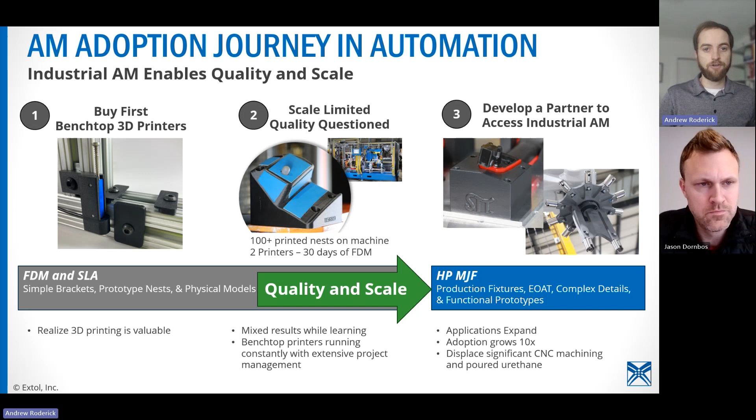When you talk about scale, right? I wanted to give you kind of a quote from one of our customers, and we see this frequently, where MJF 3D printing has a quick turnaround time. It's never delayed by raw materials, and the cost is similar or better than CNC machining. And this automation company, and we have multiple, have displaced $200,000 plus worth of CNC machined details that would have typically been poured urethane, CNC Delrin, CNC aluminum, those type of materials.

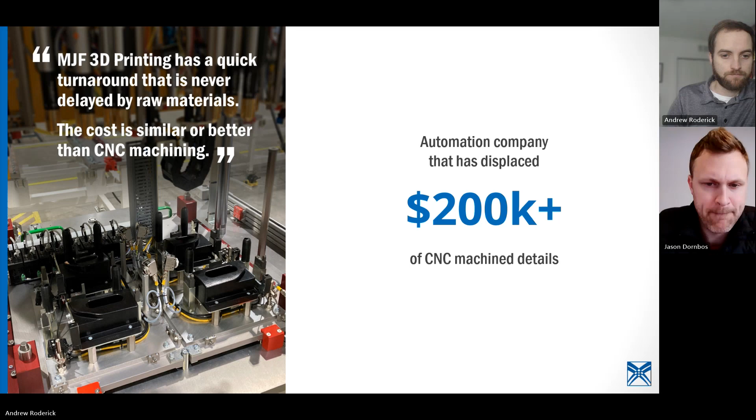So you may ask, where do we find the value of additive manufacturing automation? And the three areas that we see the biggest benefits would be dependable lead times, where for printing we could be in the 5 to 10 business days versus maybe 4 to 6 weeks if you're outsourcing CNC. Different if you have internal CNC, it's a different kind of advantage there.

Design freedom. When we see low to medium complexity details, it's similar to CNC cost. If we see high complexity details, it's less than outsourced CNC cost. And then soft touch and non-marking materials, being able to replace machined plastics or poured urethane with a printed TPU.

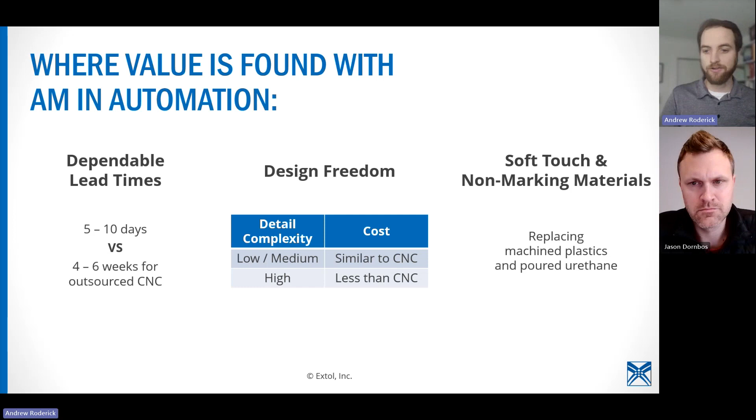So there's a lot of different 3D printing technologies, and we're not here to split hairs on all of them, right? But when I think about the largest majority of 3D printing technologies that are used in automation, there's really three. There's FDM, or fused deposition modeling. Think of that as building up layer by layer with a heated plastic going through a hot end. And that's typically what people think about when they think about benchtop or at-home 3D printing. You can see the layer lines, and it's just building with melted plastic and extruding each point of the part.

Then there's SLA. That's more of a resin-based technology, thermoset plastic versus thermoplastic. So it's UV cured, it's an engineered resin. It's not something that you can melt or reshape after it's printed. And then multi-jet fusion, powder-based, and I've actually got a video that we'll play here shortly that runs through what that industrial 3D printing looks like.

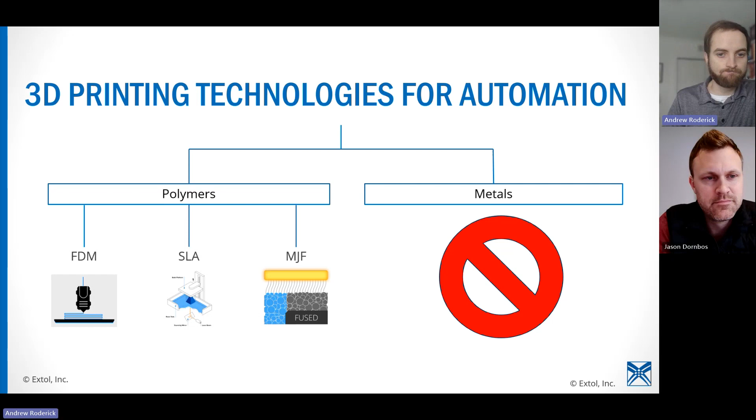And then I've got metals on there. A lot of people talk about metals in automation and like, how could we use 3D printed metals? This is going to be the next big thing. I don't see it quite yet because a lot of the things that people are looking for are simple hex posts or simple little details that the cost of the machine just doesn't justify it. So here's a quick video on the HP Multi-Jet Fusion 3D printing process.

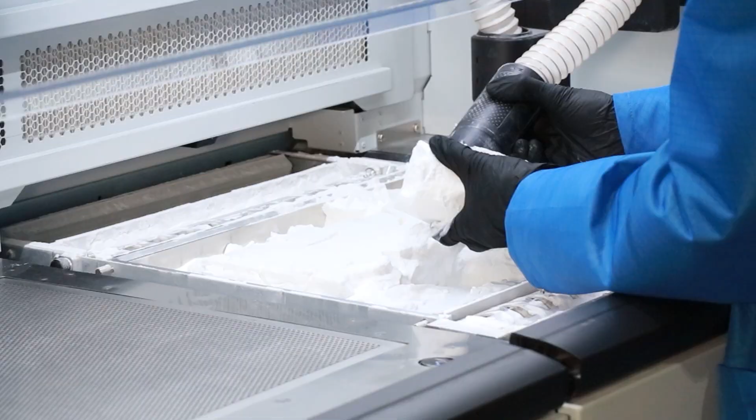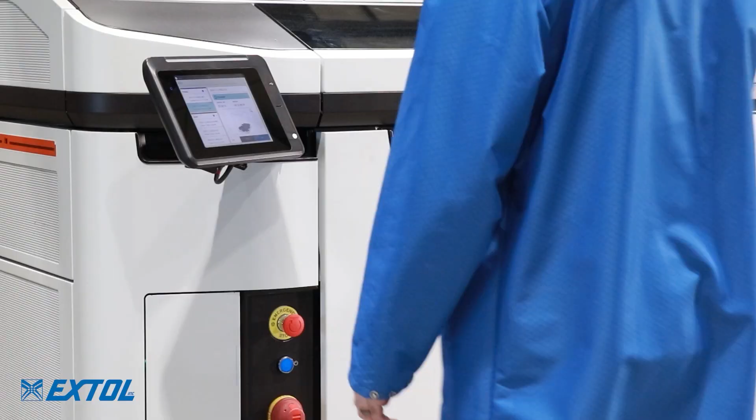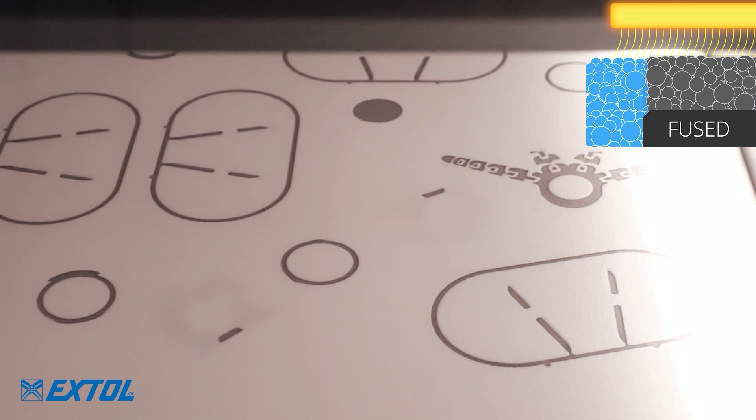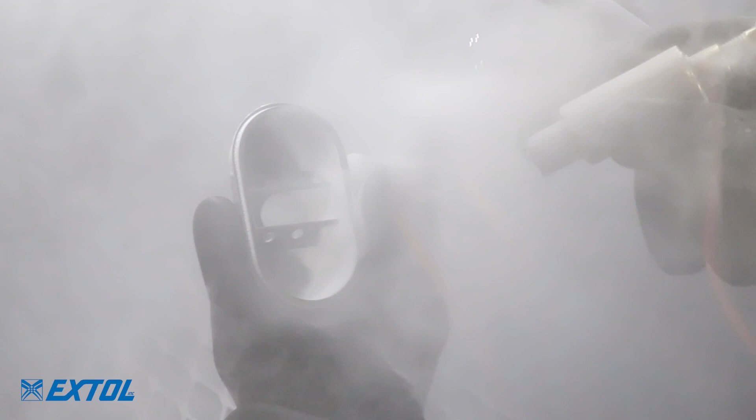HP Multi-Jet Fusion is a powder-based 3D printing process unlocking new efficiencies geared towards enabling production. Let's take a closer look at the printing process from start to finish. The process starts by evaluating each part and selecting the optimal print orientation. The parts are then placed in the build envelope. Special care is made to balance height and pack density while avoiding sudden changes in printed surface area. Parts are nested in 3D space within the print envelope, which is approximately 15 by 11 by 15 inches. Once the build is packed, it is sent to the printer. The build unit is inserted into the processing station to be filled with powder. The station automatically fills the build unit with the desired ratio of recycled and new material. Typically, the mixed ratio is 80% recycled and 20% new. The Multi-Jet Fusion printing process uses the highest percentage of recycled material of any 3D printing process. Once filled, the build unit is inserted into the printer and the printing process is initiated. The parts are grown layer by layer, 80 microns at a time. There are 4 steps to the HP Multi-Jet Fusion printing process. First, powder is spread across the build area. Next, fusing and detailing agents are jetted onto the powder. These aren't binders, rather, they respond to IR energy. The fusing agent absorbs IR energy and causes the powder to get hot, while the detailing agent evaporates, causing the powder to cool. This causes a sharp temperature transition, which results in a fused part with distinct, precise edges. Multi-Jet Fusion parts are stronger than those printed with SLS and other technologies due to greater energy exposure. On each pass, energy is absorbed multiple layers deep, creating strength in every direction. Once the printing is complete, the build unit is removed and the cooling process begins. Builds can be naturally cooled or fast cooled in the processing station. A full build naturally cools in about 24 hours, and then is ready for unpacking. First, the build unit is inserted into the processing station and the archaeological dig begins. Unfused powder is vacuumed away and reclaimed for future builds. Parts are extracted and excess powder is removed. The final step is media blasting to strip the remaining unfused powder. Depending on part size and geometry, this can be automated or done by hand. The parts get a final blow-off and are ready to be used for functional prototypes, tooling, or production applications.

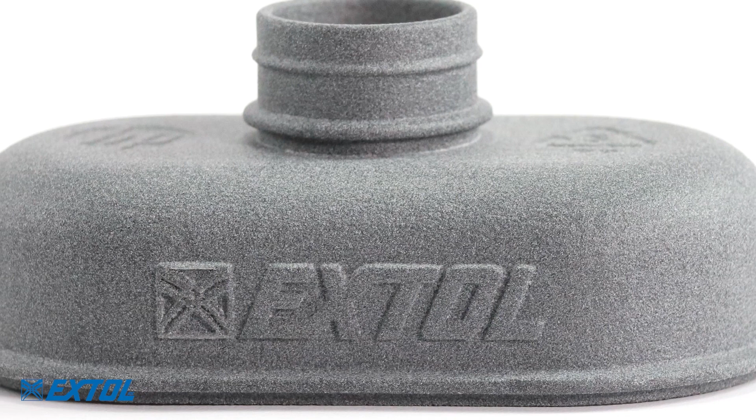So let's jump right into a comparison of the three different printing technologies we talked about earlier. Going from the top down: polymer type, we talked about that. Thermoplastic is really cool for being able to remelt and use the parts in a more functional way. Dimensional resolution-wise, MJF and FDM are relatively similar depending on the geometries.

SLA is a little bit higher resolution capability, same with the surface smoothness. SLA is going to be your smoothest, but the downside to those two benefits is it's super brittle and can break if you look at it sometimes. Breaking along the layer lines is a huge thing on the FDM side, where we see failures in automation early on in your trials.

It will break along those Z-height layers. The multi-jet fusion, as we saw in the video, has energy penetrating multiple layers deep, giving you micro welds between each layer, so you get closer to isotropic strength. When you look at air and water tightness right out of the printer, MJF and SLA are air and water tight, but FDM is way more porous because of those layer lines.

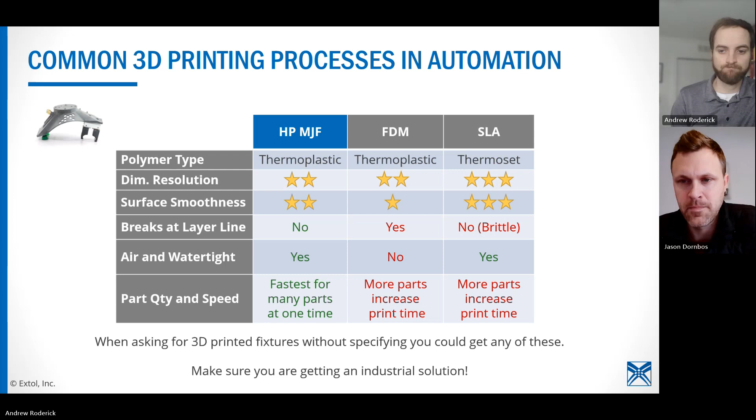Now I want to shift more into use cases. We've laid the groundwork of the journey and the technology, so now let's give you some examples of really good applications for printing in automation and industrial settings. We'll first look at rigid fixtures, then complex geometries, soft touch fixtures, and finally touch on printing parts for debugging machines.

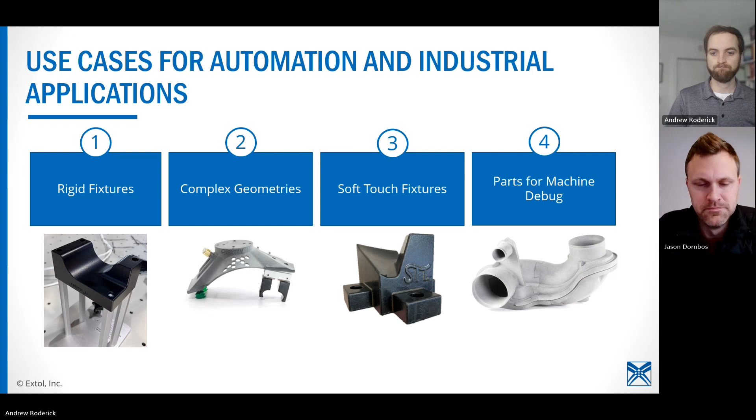So the first example, rigid validation fixtures: this was one of our customers that replaced aluminum fixtures with PA12 for extreme environmental testing conditions. It ended up being about half the time and less cost than the CNC aluminum fixture alternative. That's a big thing we hear a lot—'it's always been aluminum' or 'plastic's not strong enough'—but a lot of times plastic can be just strong enough, as well as lighter.

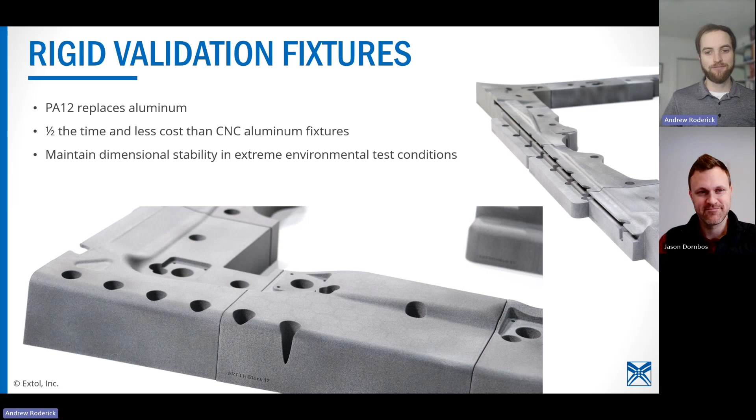The other thing we get asked a lot is, is it strong enough? So the next video is a fun example of what these printed fixtures can hold up to.

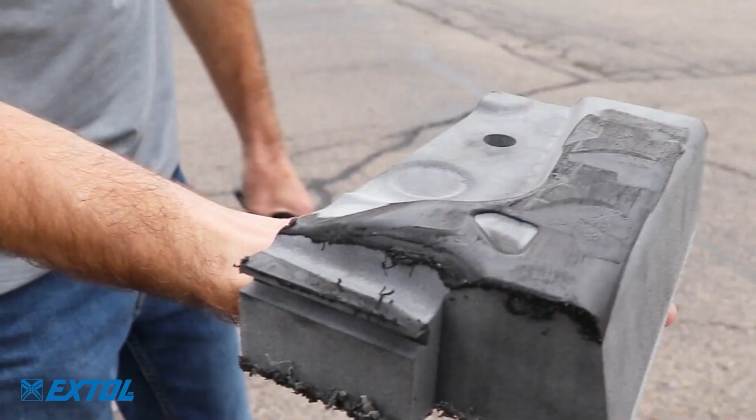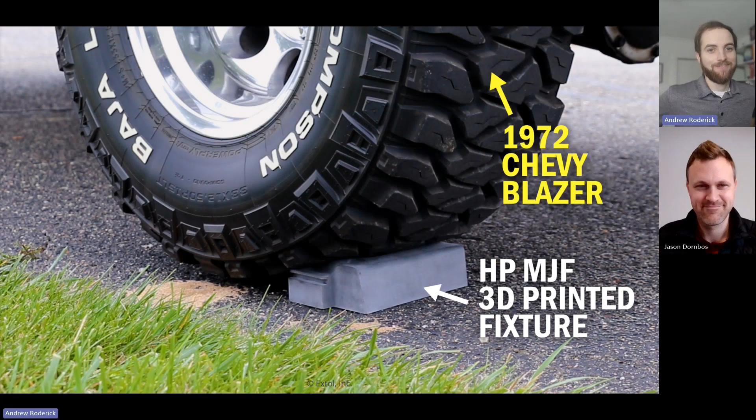Jason and I both had quite a bit of fun videoing that.

There's three main polymers we have for multi-jet fusion in-house at Extol: a nylon 12, a TPU from BASF, and a polypropylene. For multi-jet fusion there are also others—PA11, PA12 glass bead, some TPAs, different TPUs—but we find that the three we have, nylon 12, TPU, and polypropylene, fit most applications.

Here's a more detailed example of 3D printing replacing CNC parts at scale. This was a robot cell with 150 total components that resulted in 98 unique designs, so not a lot of quantity of each individual component.

When you compare traditional manufacturing to multi-jet fusion printing, you can see there was a great reduction in lead time. Cost savings were substantial for a project of this size and mix of components and complexity, and design freedom was definitely very high with being able to print it.

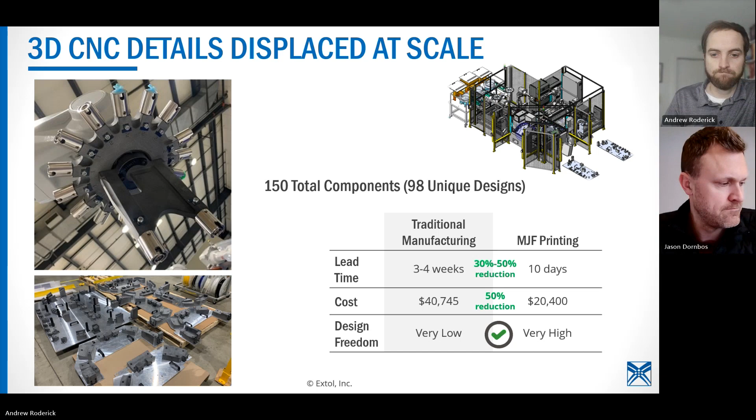So the next group of applications I want to touch on is complex geometries. You can see here multi setups in a 3-axis CNC or CNC operation, or 5-axis, or not even machinable.

Whether it's integrating sensors and passageways into the parts, whether it's specific air cooling properties to be able to shroud an ultrasonic horn, or an end of arm tool that has the vacuum lines integrated right into the printed component.

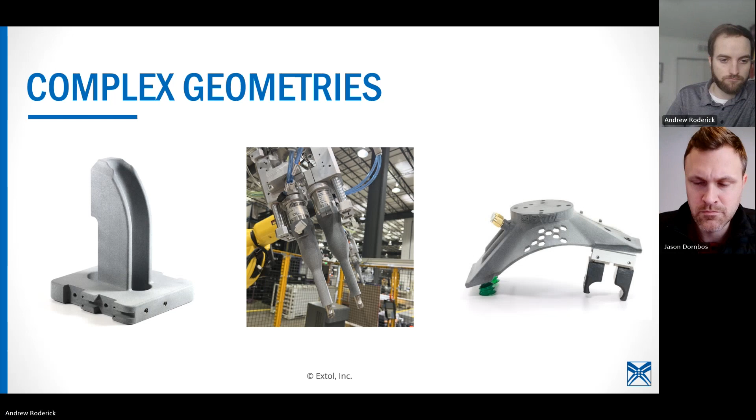This was actually the machine fixture that we showed on the title slide. But this is an example of a full machine fixture package.

But really the benefits for this, right? We had complex geometry. We had threaded inserts that were able to aid in mounting sensors and clamps and different things like that. And then it's a high mix, but low quantity of each individual.

So it would be higher time for CNC programming and different things like that, of programming for just one detail of each style.

And something like this might cost around $7,000 from a package standpoint. So very, very similar to a CNC package there.

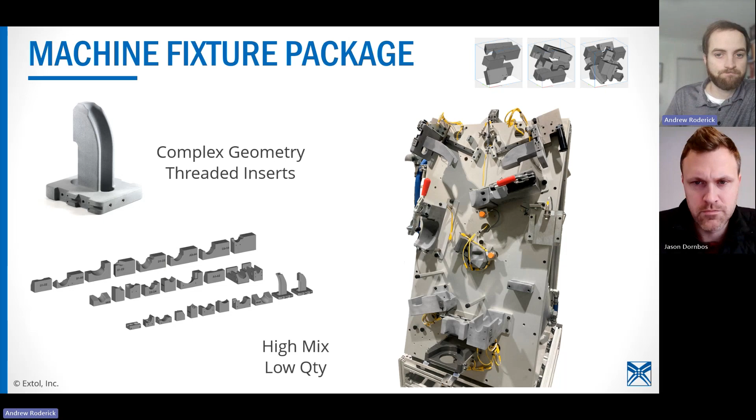Yeah, but definitely feasible. And then you can do self-tapping screws, all sorts of things. But from a machine build side or custom automation, we typically see a brass insert. That's something we can help you with and provide in the printed part when it shows up at your facility. We could have those installed for you.

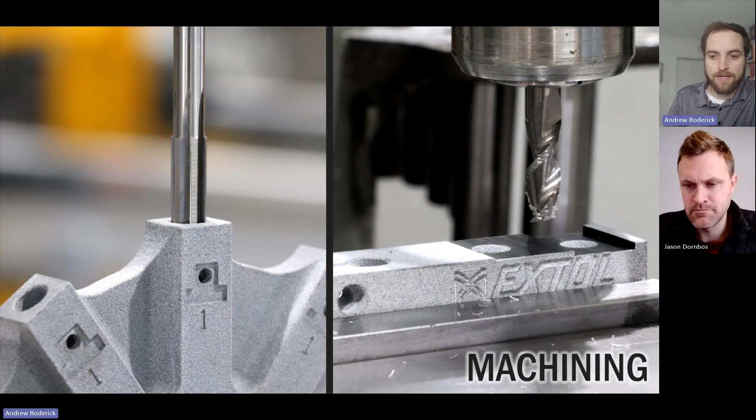The other thing that's unique about MJF over other printing technologies is the robustness, being able to machine, whether it's reaming out a dowel hole or just decking off the surface, different things like that. Definitely feasible.

So yeah, Josh had a quick question: if we work on the design for an end of arm, do we get the STL file also? Typically, we're helping our customers with the design from a consultative approach, but we do also have CAD resources.

Step file, STL, that would be the output. If you have a design that you're designing and you want us to print, step file or STL would be what we'd want to start the conversation with.

That's a really good question too, on the printable thread size. I would say that it's in the M6 to M8 range. If you go any smaller than that, you're probably just going to have to chase the printed threads with a tap anyway. So I would go with printing the tap drill size and just adding the threads afterwards.

I have a question about machining. Is one of the benefits of that the ability to print a fixture, and then when you actually get real parts that are going to go into the fixture, you can then machine it and tune it to those real parts, as opposed to, because nothing ever lines up exactly.

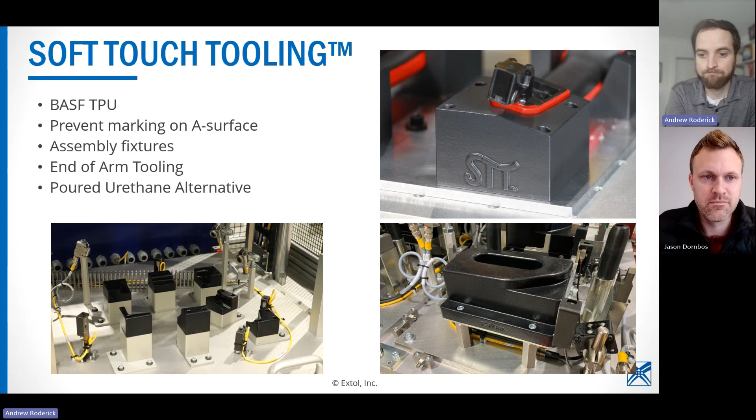Great comment there. So yeah, this would be that soft touch tooling package that we talked about. You can see that in the build on the left hand side: 4 different nests, honeycombed and vapor smooth. We'll touch on those specific things in a second here.

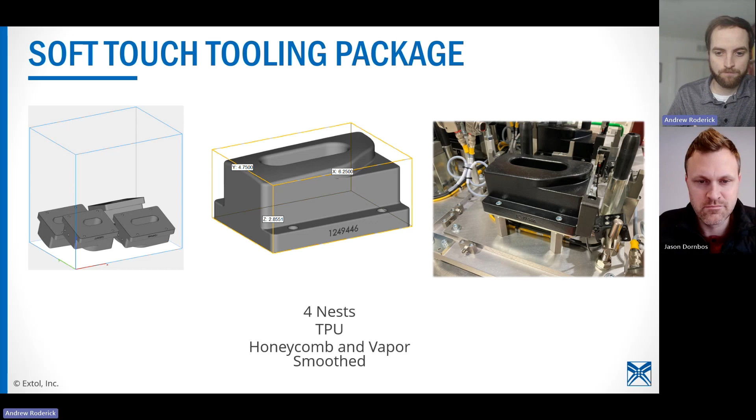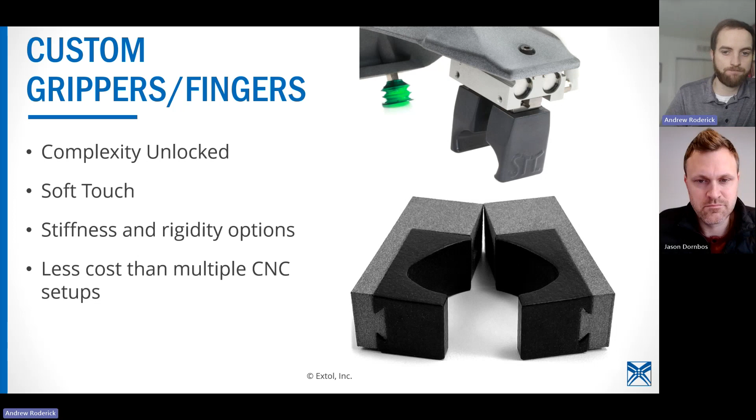And then just real quick, I want to touch on parts for machine debug. We see a lot of machine integrators or manufacturers that have a delayed injection mold tool, and they can't set up their manufacturing cell or their fixtures without some sort of part to get them close.

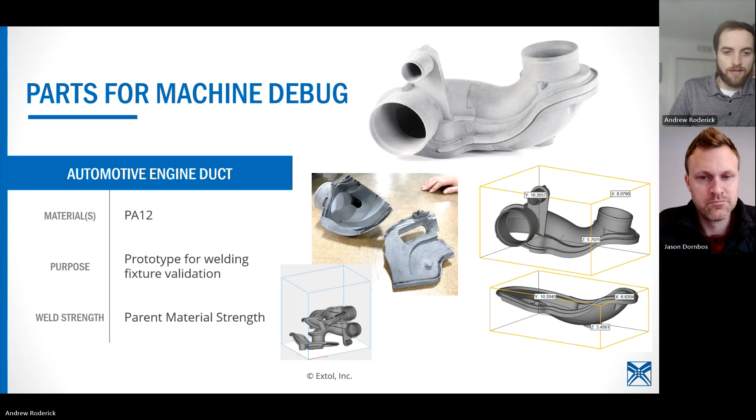So in this case, we were prototyping a part for a customer to be able to validate their welding fixture. On the next slide we can see that the printed parts were actually able to be welded because they're thermoplastic. This is a vibe welder with our printed parts.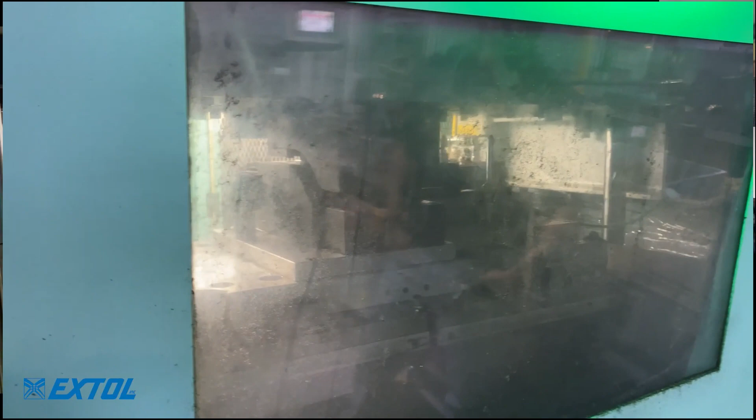So that was a nylon 12 that was just welded there. For vibe welding, nylon 12 works well. Spin welding also works well. Laser welding, from direct laser welding, you could use that too. And then for hot plate welding, we typically use polypropylene for reservoirs and different things like that.

And we have a resident expert of the shop that was just shown here in the chat. That's awesome.

So some really high level things to think about from a design and best practices standpoint. I'd be happy to go into any of these way deeper one-on-one with you guys if you have specific applications you want to talk through, but I'm going to go through these pretty quick. This PowerPoint will be available on the recording if you want to dive in deeper.

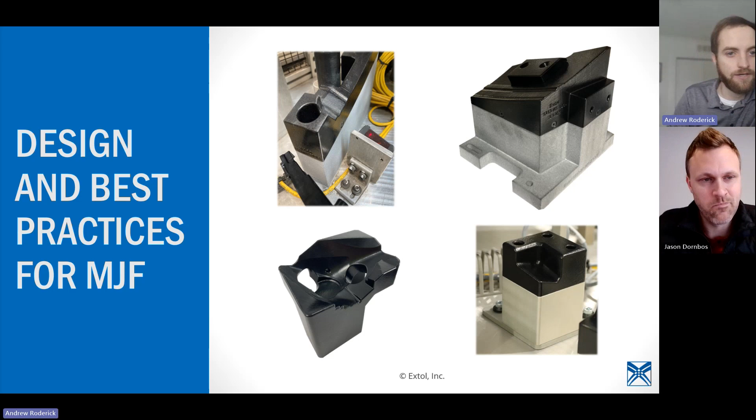So when we talk about 3D printing, we want to talk about optimizing fixture size. When you have a manufacturing process where you're putting material only where it's needed, you also want to think about that in your fixture design versus limiting the amount of details. You want to limit where you're supporting to just enough.

So with that, you can minimize the cost by having smaller to medium size details that can nest better in an MJF build. Support only where you need it. Better printer efficiencies, like we talked about. And then it also gives you flexibility from not having a detail or a part that's landlocked in a few large fixtures that are supporting it from multiple angles at the same time.

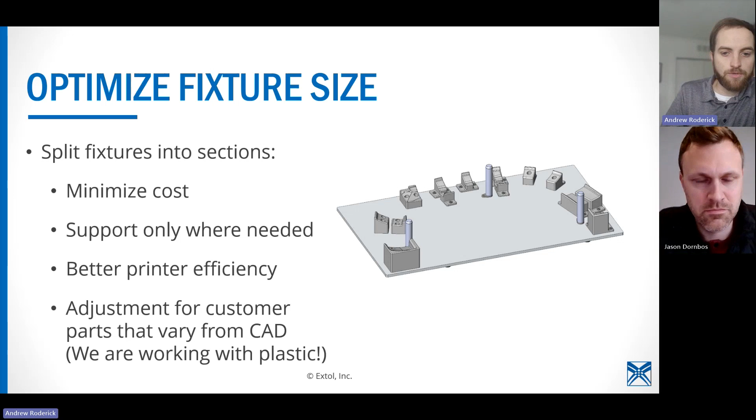When we talk about cost optimization, this is similar to those same lines. When you think about the analogy of how you fit the most material into a jar between rocks, stones, and sand, we want to do the same thing with the printing envelope.

So for something like this, we had a large robot cell that had 150 components on it. We started with a large part, and then we sprinkled in some pebbles or stones, and then we added sand. This was able to spread the cost over a lot of different details.

Maybe that large detail would have been more cost effective by itself to be machined, but with the whole package it was way less when looking at costs.

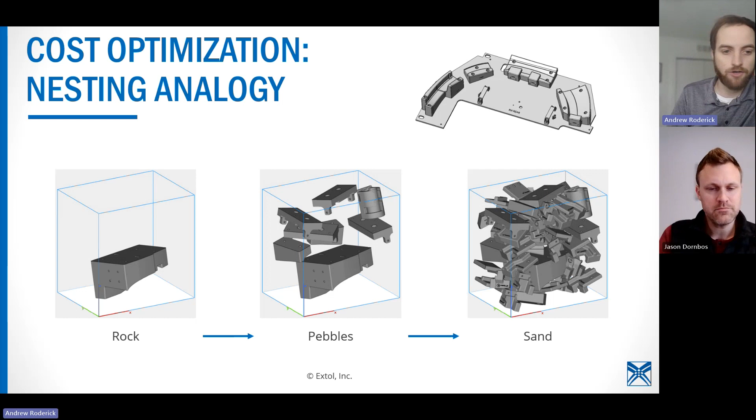The other thing to think about is honeycombing. There's a thing called pack density, so how much surface area is being fused at the same time on one single layer. For this bulky block, you can physically fit two parts on a single layer, but the pack density is too high. It's in the 30% range. We want to be in the 8 to 12% range for a good process window for these printers. So it's not feasible as shown.

If we want them solid, we have to increase the height. Increasing the height also increases the cost because how long it's in the printer is the greatest cost driver. So your nesting density on this middle example is around 14%, which is feasible, but you've got a cost increase. We'd be looking at, say, $1,250 a part in this example.

As soon as you do honeycombing, you can see the internal honeycombing here. Typically we don't have it exposed, we just trap the unfused powder in those internal channels. But as soon as you honeycomb it, the density goes way down and you can put it back on the same layers as you had in the very first place, and now it's printable. You've more than halved the cost of the parts because you just honeycombed it.

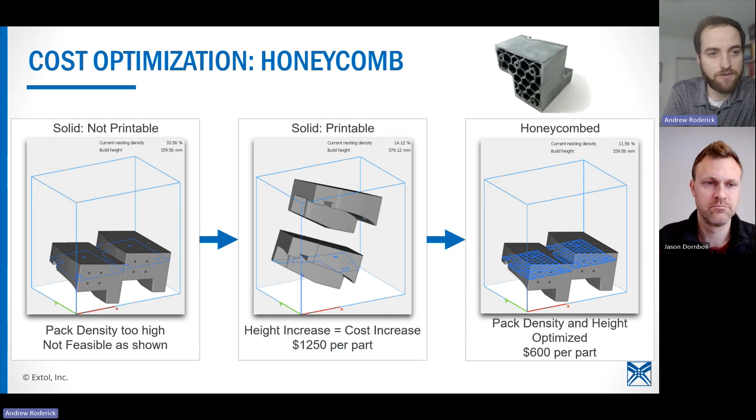So that's a service that Extol provides. We have software that honeycombs that, so you could just give us the solid model, and we could walk through what settings we'd want to use together for your specific application to make it most cost effective.

When we talk about soft touch tooling, there's two different methodologies. There's a TPU cap design, whether you're printing a PA12 base and a TPU cap, which allows for changeover. It does increase the design time a little bit because you're splitting and you've got that joint to design. But it gives you the ability to have a stiffer fixture if you have a really tall fixture, putting the expense of the TPU, a premium material, only where the value is touching the customer part.

Or you can go the full TPU route. It gives you simplicity in assembly and simplicity in design. This works well for shorter fixtures that don't have a lot of Z height to make up with a different material, and for lower force requirements.

Yes, we have used this for sonic welding. We have a customer that does a 4mm cap as the TPU with a hard PA12 base on it. So in that case, we want to increase the rigidity of the nest so that the sonic welding doesn't dissipate the energy too much in the TPU, but it works out great.

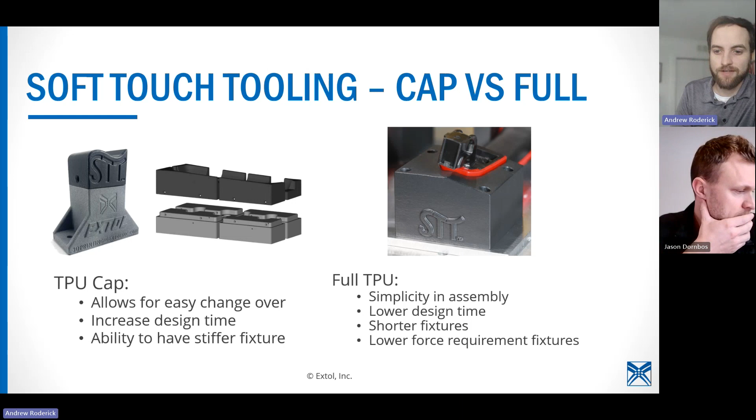That's an interesting note from Jason about pricing in Europe there.

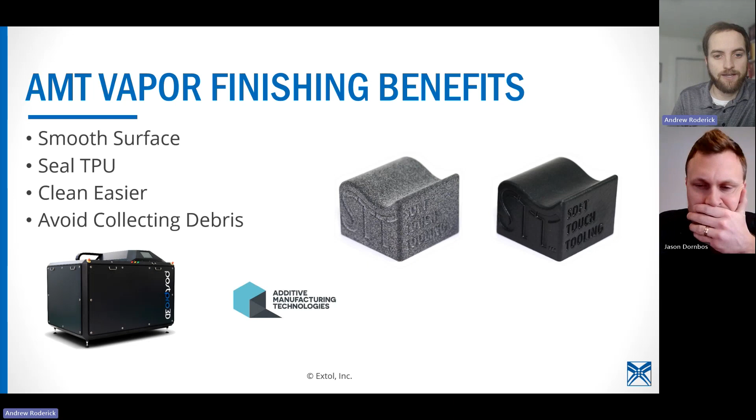The vapor smoothing process is a chemical smoothing post process that takes the TPU and PA12 from a gray texture and color to more of a nitrile rubber look on the TPU side. It gives you the benefit of cleaning your nest easier, since it doesn't allow debris to collect in the crevices of the outer surface roughness of the printed material. It's also a great non-marking attribute.

From a vapor smoothing consideration, we're hanging the parts if we're vapor smoothing, or setting them on a wire mesh. So knowing where we can hang them, whether we add a hole or a loop to hang the parts, or just set them on the wire mesh on a non-critical surface, like the mounting surface of a fixture.

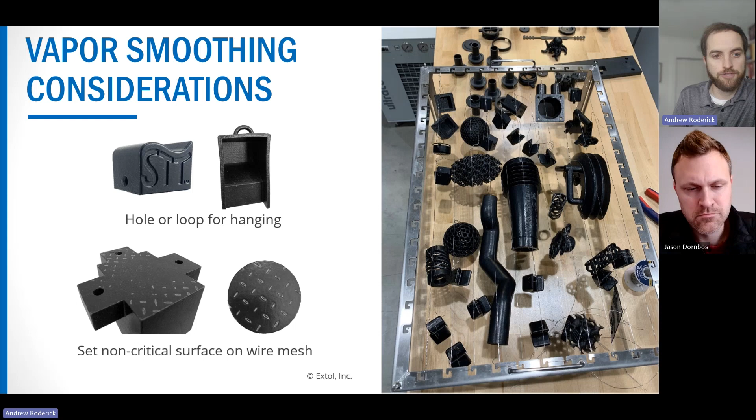With that, just a few more best practices. Add radii wherever possible, avoiding sharp corners—that's the biggest benefit of additive. When you're trying to reduce the ability for marking, the bigger the radii, the less your parts are going to get marked in the fixture.

From a labeling standpoint, part labeling, we can also do that as a service, but we typically use Arial Bold around a quarter of an inch or 6mm height font size, and about 0.75 millimeters or 30 thousandths of an inch extruded, debossed, or embossed into the part.

Yes, you can add one yourself, Jason. Go ahead and put it in the comments and I'll read it for you.

And then standard honeycombing—those are some things that we think about. Consult Extol on an application before or during design to ensure the best results.

If a large part fails during print, are we charged for the extra reprint time?

So that would be a no. If it's something on the design side or different things like that, and it breaks after printing, that might be a different story. But if the print bed fails, that would be on us, and we keep these things humming.

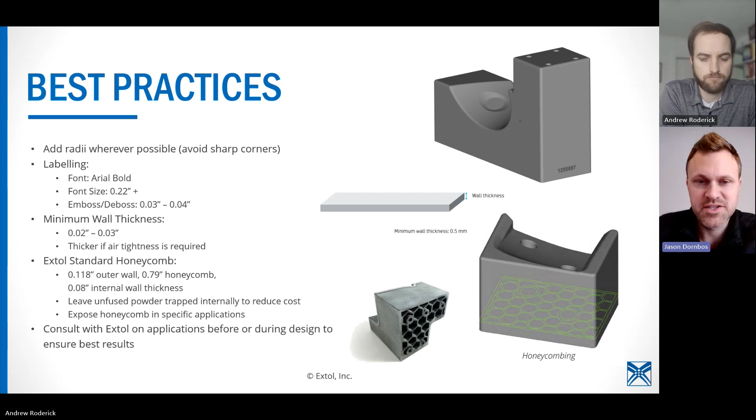I wanted to take a moment to explain how 3D printing fits in with the other things that Extol does. At Extol, we solve complex plastic manufacturing challenges. That's our strategy, and it's actually depicted in our logo. The square cross portion of our logo shows this graphic. There's people and companies with plastic welding expertise on one side of the chart, and others that have custom automation expertise on the other. The issue we find is plastic welding providers don't do very well with custom solutions.

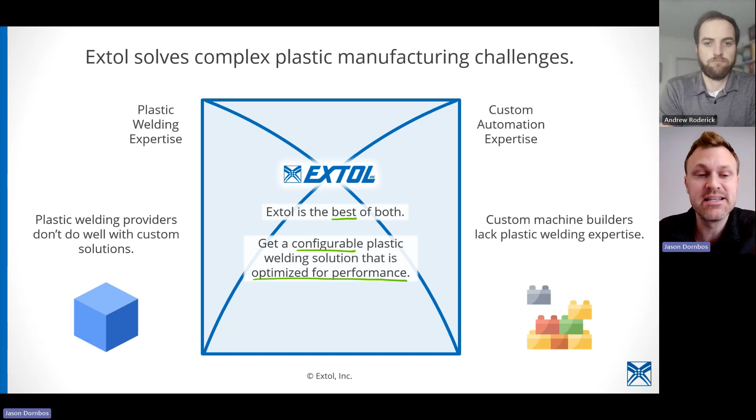They basically make a box like a standard machine, and hopefully your application fits within it. On the other side, we have custom machine builders that lack plastic welding expertise. They can craft a solution around your application, but they don't have the plastic expertise to make it a high-performing, optimized solution. Extol is the best of both. You get a configurable plastic welding solution that's optimized for performance, because we have both the plastic welding expertise and the custom automation expertise. And that splits out in 3 different ways: engineering services, plastic assembly technologies, and custom automation.

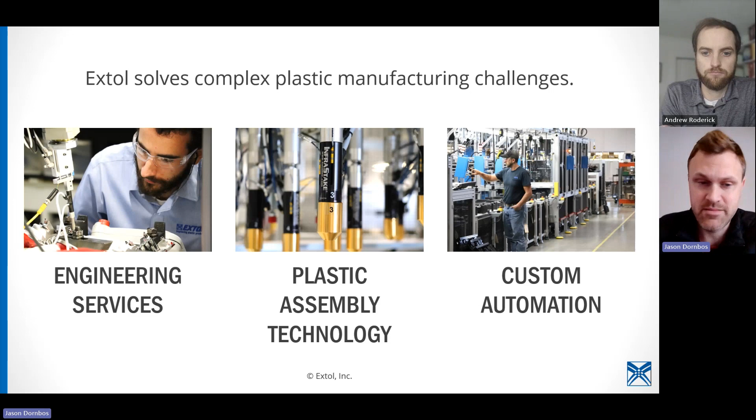3D printing, we can classify that as an engineering service. You can get 3D printed parts, 3D printed fixtures, prototypes, or production parts. Our lab helps you with development of your applications, and we'll do some prototyping for you, run trials to help you validate your application, your part design, your manufacturing solution. We can help you with all of that.

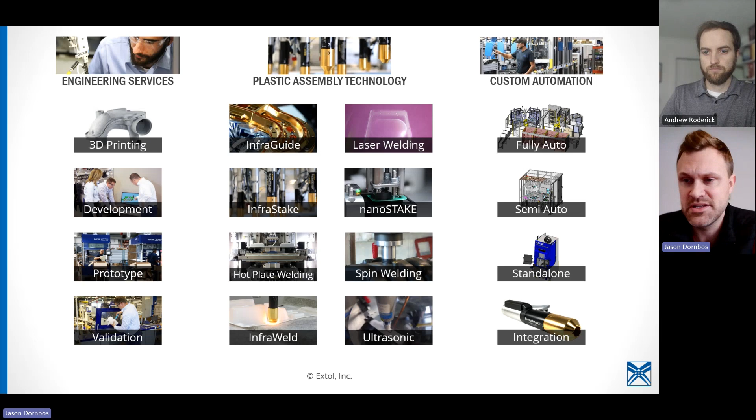You can see there's a bunch of different plastic assembly technologies that we offer, and we will build into a machine, or we will sell to your own preferred machine builder, and they can integrate it into some equipment. Lastly, we supply custom automation, whether that's a fully automated line that nobody ever touches a part, semi-automated, standalone, kind of everything in between. And then, of course, those integration packages that can be integrated by any other machine builder.

We partner with you throughout your project lifecycle. When you're in the development stages, we help you with manufacturing concepts, and we develop an efficient and robust manufacturing process for an optimized solution. We help you design your weld joints and 3D print samples. We also help you prove out your processes with trials, which gives you confidence that you're going to be ready for production.

Then when you're ready to move to validation, we print those parts and can help you with prototyping. We can help you with building parts to fulfill early production quantities. And when you're ready for getting equipment, our innovative plastic assembly technologies are at your disposal. If you're already working with a machine builder, we offer integration packages. And of course, you can press the easy button and just get your whole assembly solution from us.

We customize your equipment to meet your exact needs. Whether you need standalone machines, interchangeable fixtures, or fully automated assembly lines, we've got you covered. And then when you hit production, we install the equipment and support you. You can have us help you with preventative maintenance, spare parts, troubleshooting, repairs. We get feedback all the time that says our service and our support is excellent. And if you need to make updates and process improvements, we can, of course, help you with that. We also have, we can do some contract manufacturing if you've got some low volumes.

And then finally, as your project phases out of production, we can help you retrofit your machine or build new tooling for your next project. We also refurbish equipment and make it like new again, so that you can have many, many more years of service with whatever capital you've purchased.

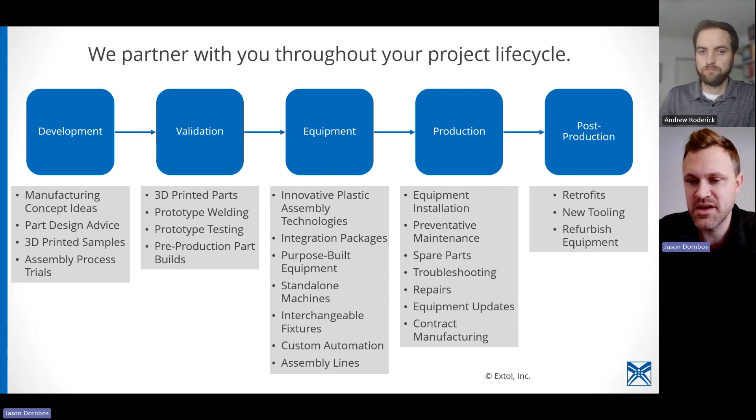David has the question, how does MJF part density compare to solid plastic parts? Yeah, that's a great question. Typically, I would say it's around 99.8% if you're printing it solid, right? There's going to be a little bit of the fusing agent or the carbon black in it. It really depends on how the plastic is manufactured, right?

So when we're comparing an injection molded brake reservoir versus a 3D printed brake reservoir with identical geometry, the printed part is about 75% of the total strength or burst pressure. And the main difference there is we don't have pressure in the printing process that you do have in injection molding. Yeah, so sort of pack pressure. Yep. So those would be the two insights I would say to address that question.

I have a question. This fixture that's in this video, was that honeycombed or solid? That was honeycomb. It had a 3 millimeter outer wall with 2 millimeter honeycomb structures that were about 20 millimeter size hexagons. Oh, okay, nice. So that is a honeycomb fixture.